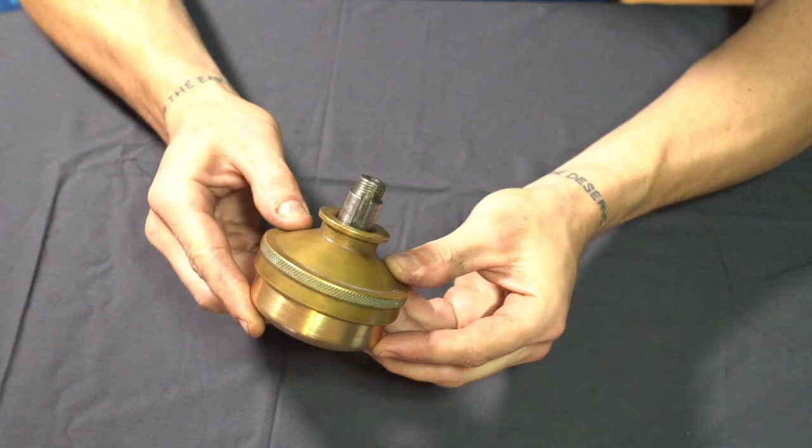Okay, so what are we doing today? I'm going to be making one of these things, well, part of one of these things. This is the top end of the gear housing which lives at the top of a steering column from a Model T Ford. It's a planetary gear set inside, reduction gears, steering wheel sits on top, output follows the shaft down to the steering ball joints, probably how I'll describe them. Steering box isn't really correct, but it's a pretty rudimentary device. I'll go to a cut in a moment and talk about where this sits using a video reference and how everything interacts. But long story short, I'll take this guy off.

With my Model T, which I have, it's a build I finished a few years back. It's an ongoing work, a labour of both love and hate at times. But I like putting brass onto my Model T. It's an absolute mishmash of different parts and years, but it's still a Model T Ford.

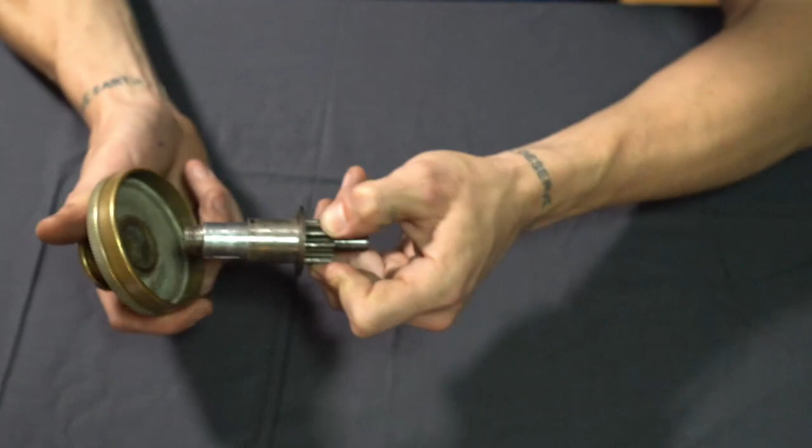Okay, so what am I doing? Put that over there for the moment. So this guy right here - it's just the cap which holds a shaft which the steering wheel sits on, a keyed shaft, there's a keyway through there, a hardened pinion, hardened washer, and then a ground hardened sleeve which fits quite nicely like such. The steering wheel sits on here. I'll put another video in a bit later and we'll go over how it's all put together.

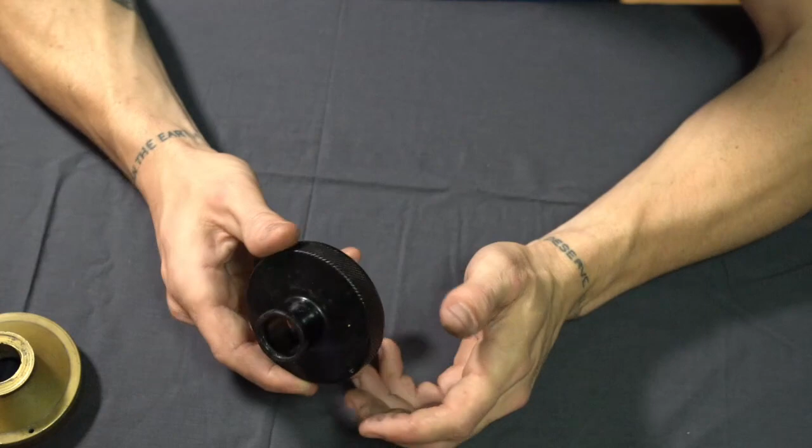Now, what I've always run on my Model T as a steering cap was this guy. It's just pressed steel. I actually don't know if this is an original or not - I think it isn't, given the knurling on the side has next to no wear on it, and a few other bits and pieces. But does this work? Yes. Do I like it? Yes. But I like brass more.

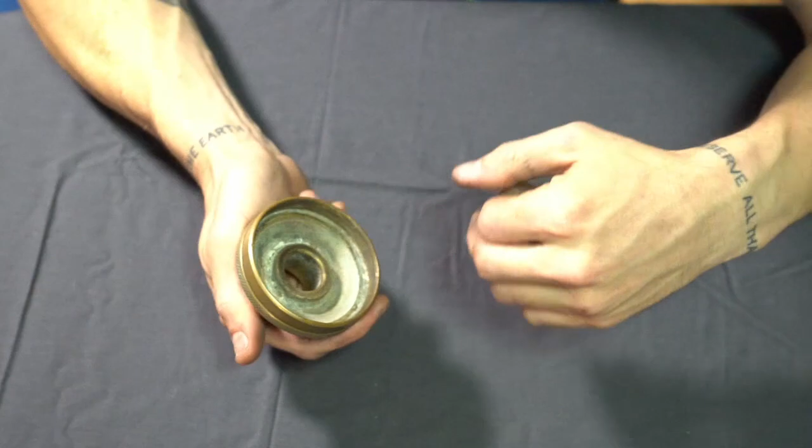So I've been very lucky to get my hands on one of these guys. It's an original from between 1908 and 1910, is my understanding. This one's in extraordinarily good condition - there's no marring through the bores, no marring on the top, the knurling is still in good nick, as is the thread on the inside. I don't know how much these are to purchase as originals, new old stock, or reissues. I enjoy making things more than purchasing things. So we're going to recreate this guy.

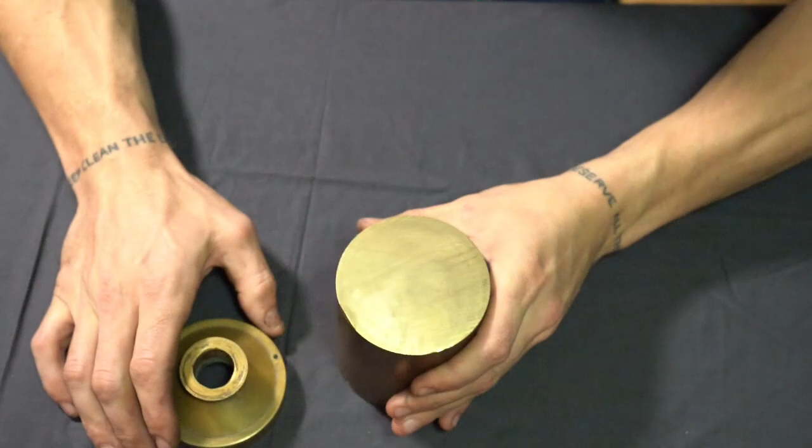So what am I doing it with? Well, brass - I'm doing it with brass. This guy is an 80mm bit of round bar, 100mm long. I ordered it online a week or two ago and it's finally arrived. Had to get it shipped in because trying to get this sort of brass in small quantities in Perth here is irritating.

So I will hope to put all of these video components together into one video so you can watch them in one spot, in one session, but who knows - we know these video series tend to blow out a fair bit into multiple videos. But it's a relatively simple device. First up, I haven't been able to get my hands on any tech drawings or technical specifications, geometries and such for this.

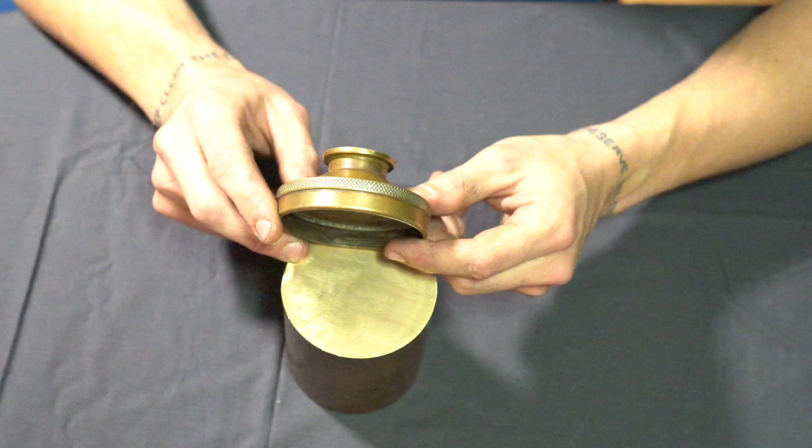So the first thing we need to do is measure all of our critical dimensions as well as our aesthetic dimensions. I'm going to look to recreate this as accurately as I can. There will end up being changes between this and that, of course, but I'll try to minimise or hide them. So if you have one of these on your car and mine ends up a bit different, call me out - I'm actually keen for that. But let's start taking some dimensions.

And there goes the lump. Alright, so I have some utilities for taking dimensions: paper is a good one, my model is a good one, caliper, thread gauge, and a pen. Pen is also extraordinarily helpful for taking dimensions.

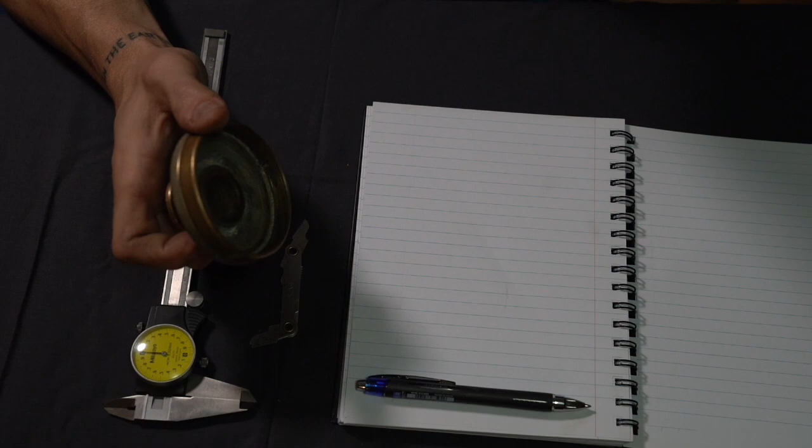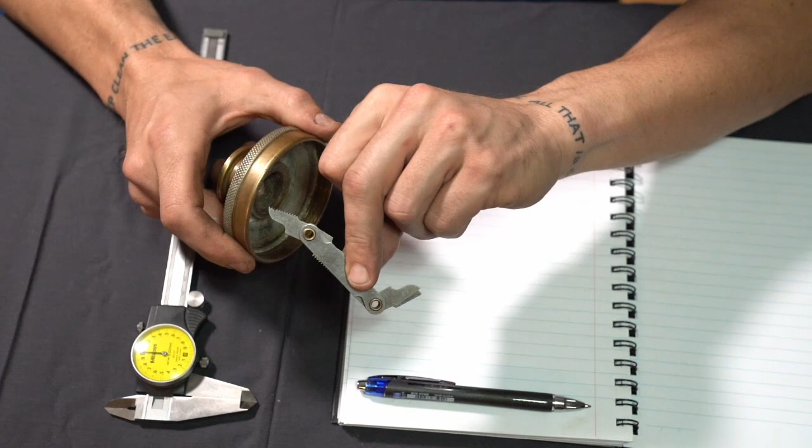This is an imperial measured item. The thread looks to be imperial. It might be Whitworth. I'm not actually intimately familiar with Whitworth, and I have no real desire to be intimately familiar with Whitworth threads. But I was able to get a good reading off that using an imperial thread gauge. So let's start.

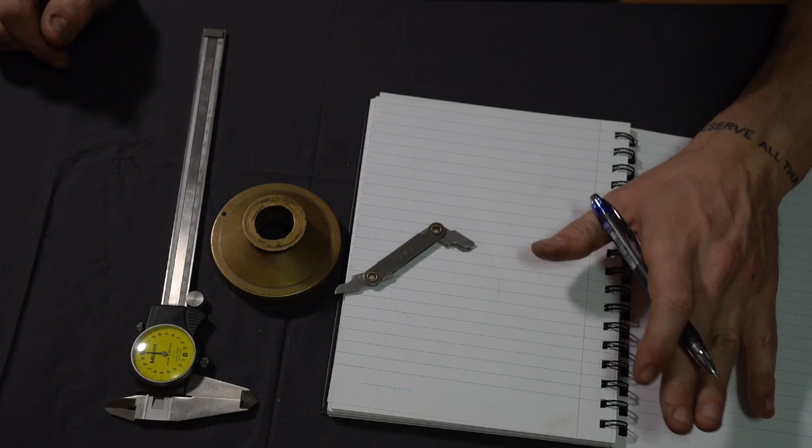Now, how this appears on the screen might be a little funky. I'm shooting over the top of myself from the front. I hate having a camera over my shoulder because I'm a klutz and I'll knock it over and I'll end up injuring myself, and then this video will never see the light of day.

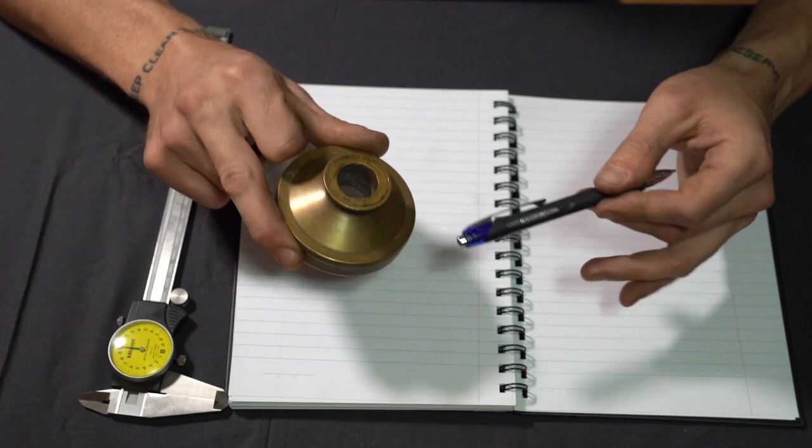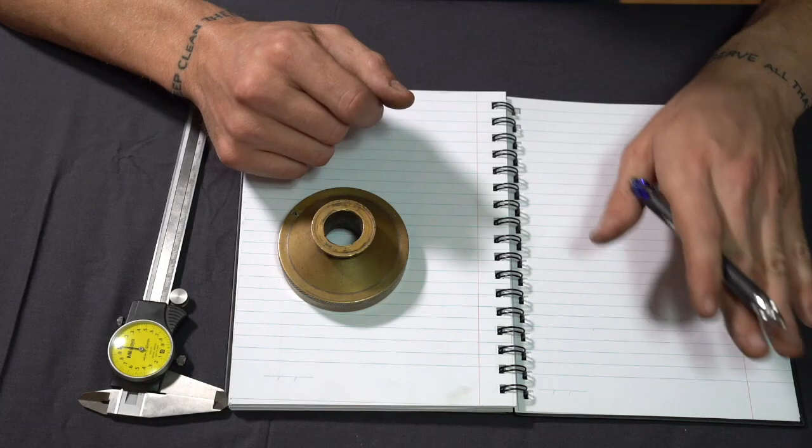Sweet. Alright, what we're going to do first up, I probably could CAD this better and faster. I'm no drafts person, I prefer having paper anyway as a reference, size reference for whatever I'm doing. If I need to at a later point, I'll photograph it because it ends up with oil and maybe blood all over it. There probably won't be any other mess involved, but we'll crack on.

So, rough shape. What I'll do actually, I'll bring this up to the camera and we'll have a look at it in general. So it's a revolved part, so if you can see that from the front, just picture that going around and around in circles forever. We have knurl, there's a reduced shoulder, there's a small flat on top here and then a taper. Now there's a small radius between the taper and the vertical section there, but it's a flat vertical otherwise with a small radius on the top side of that vert as well.

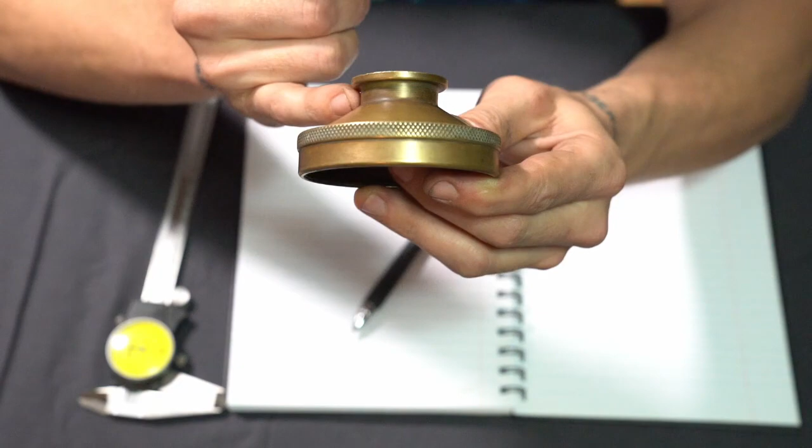I've got a shoulder. The top face here has a very slight counter bore. That might just be for washer locating. I'll be putting a copper washer in here afterwards as well. Then we have a bore. Bore is an important dimension, the size of that bore.

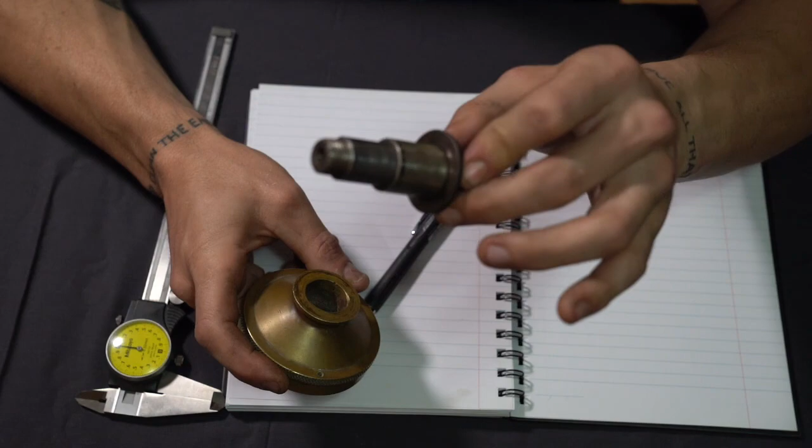So this axle, shaft, arbor that the steering wheel mounts on -- steering wheel on top, and it seats down here on that shoulder. This is a bushing for that particular steering shaft. So it'll go in there and it holds it firm.

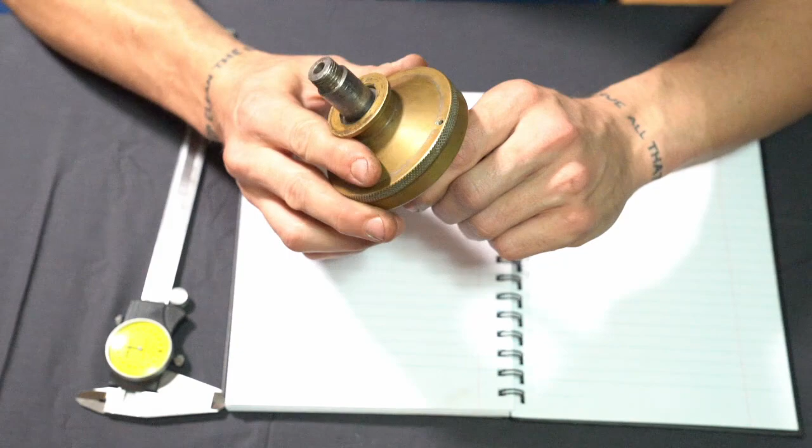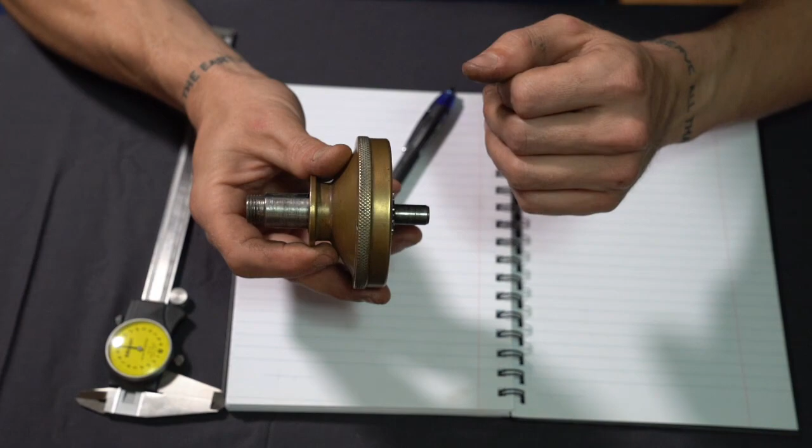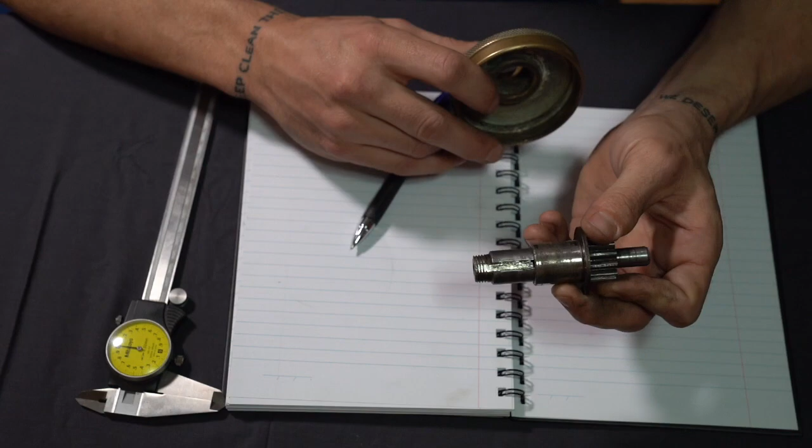So we want next to no play, radial play up here. End play within reason can be eliminated using washers, spacers, etc. But I want as little radial play as possible up here. So the bore's pretty important. Another important dimension is going to be between the bottom, where the thread's going to seat, and then the top face there. We can get away with a few bits and pieces there, but I want to try and keep that original. We only have so much room for adaptation in the length of this shaft.

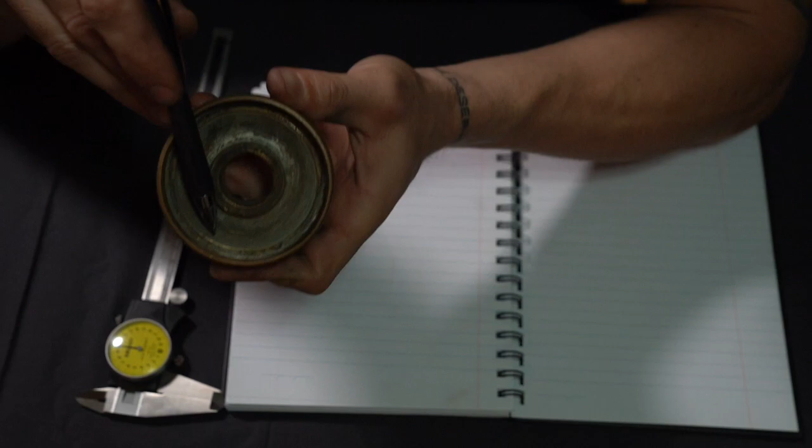Alright, next up, looking in. What do we got? So, yeah, this is all bored out through here. It's all hogged out and then bored out. If you can see in -- yeah, I think you can actually. There we are. If you have a look in there, there are still remnants of the casting process. That's a pretty rough finish. So I assume this has all been cast, and then it's been cleaned up through a turning process of some description.

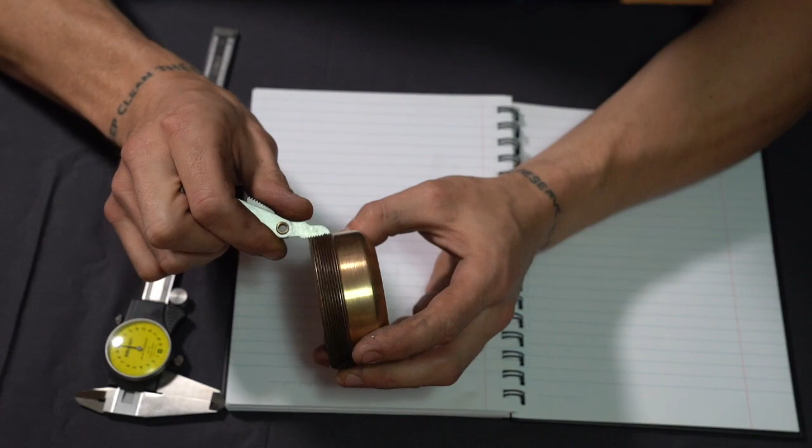Next important thing is the thread, which we can see -- I'm pretty good at this left and right thing. We can see a thread in there. Now, using my thread gauge, which I prepared earlier thankfully, it turns out to be 18. How are we going to do this -- 18 TPI. I'll use the opposite part of the thread. So if we can get a good look in that, and we can bring it up close, it's 18 TPI. So that's what we're rolling with.

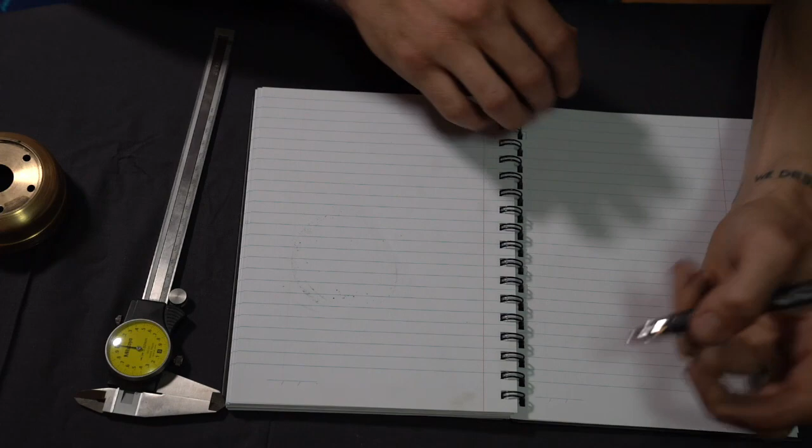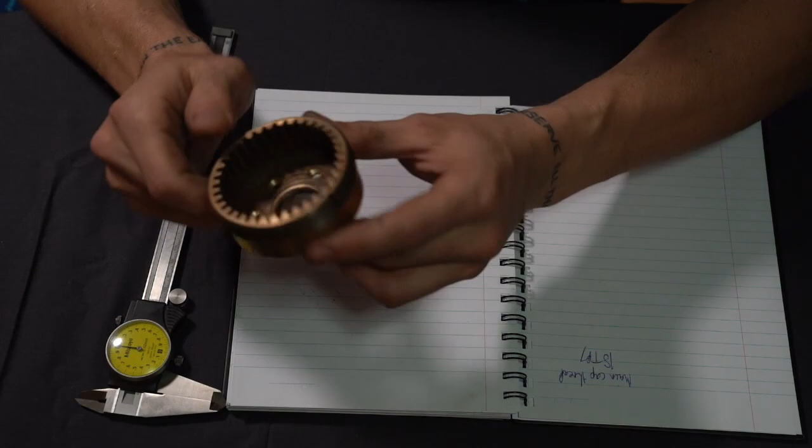Main cap thread, 18 TPI, fantastic. Now I'm also going to use the bottom part of the assembly, which that will screw into. I'm going to use this for size reference as well.

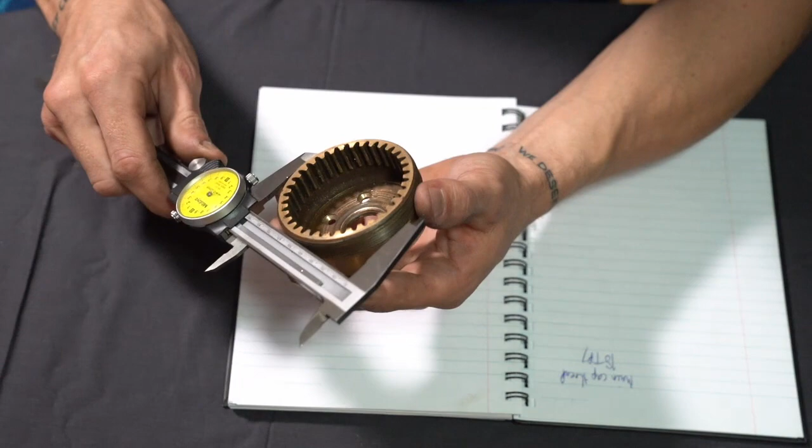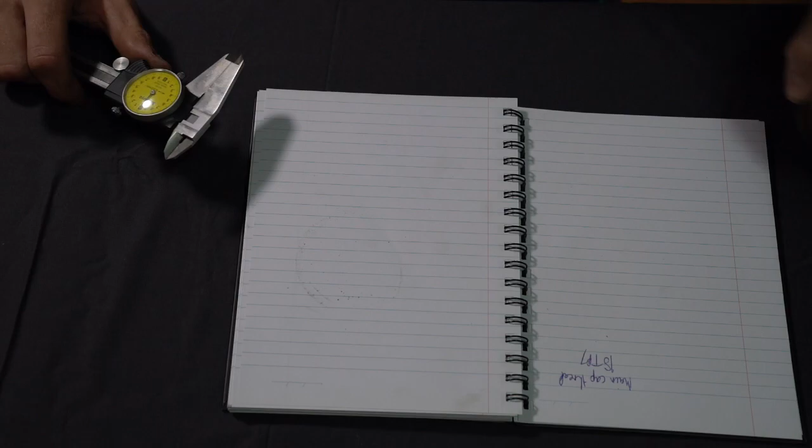So, what size is our diameter where that thread sits? This is obviously not going to be perfect, but -- come on, there we go. So we're going to have a look at that one, that way. So assuming the camera is focused on that, we're looking at 76 millimeters. So given wear on this and this, we can pretty safely call that 3 inches. So I will work out the minor diameter for the part that I'm going to make, but cool.

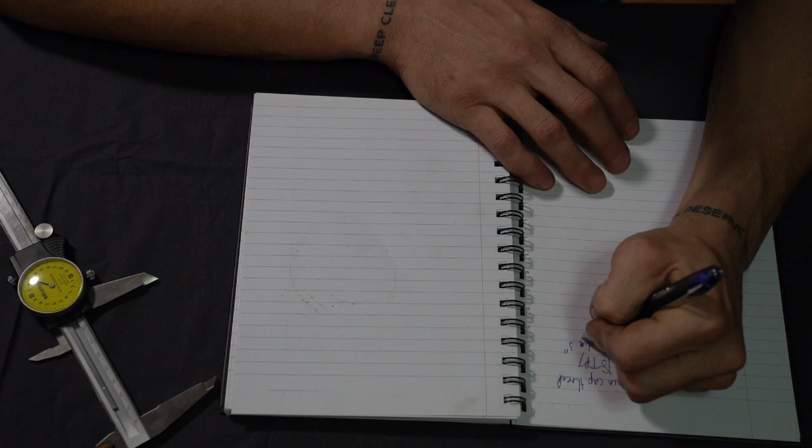3 inches. We're going to call that main cap thread diameter 3 inches. Thread has an A in it. 3 inch, or 76.5 millimeters. That's not right, but I'll leave it for the moment.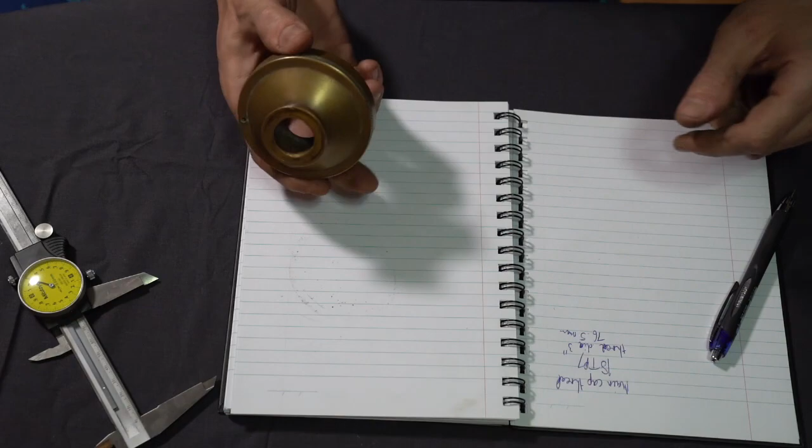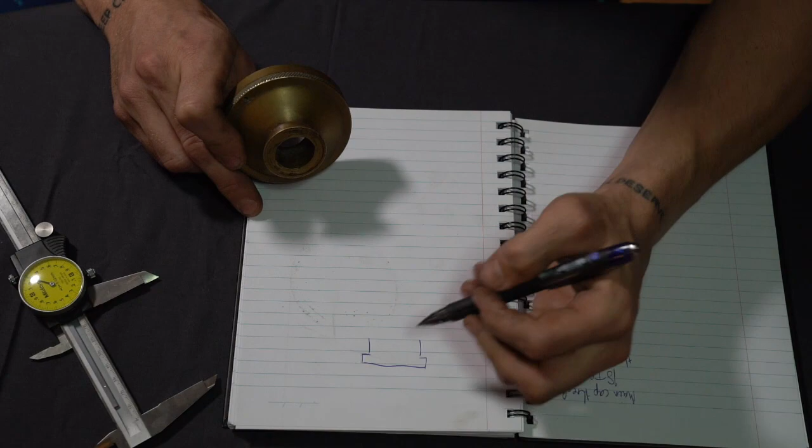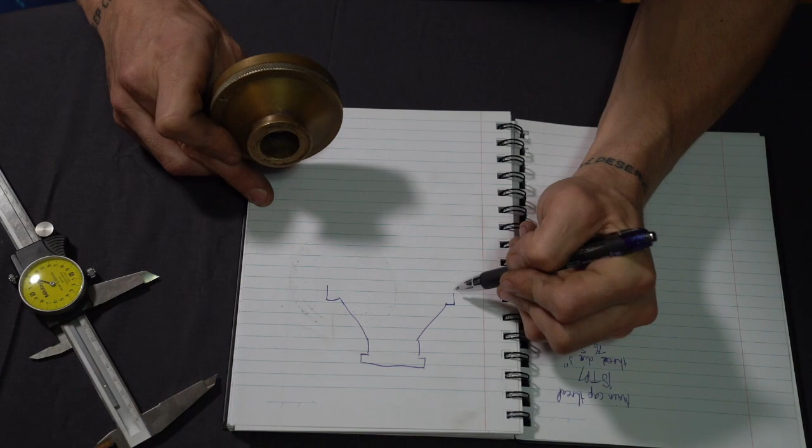Happy days. All right, next up, we're going to start plotting out bits and pieces. So I'll do a rough drawing. We'll do just the side profile of this guy. So we have, like so, down, taper. Flats -- we have 2 flats. We have a knurled section, which is stepped out a little bit. We're going to come in and then down, in and then down. Small radius down here. Alright, so there, side profile.

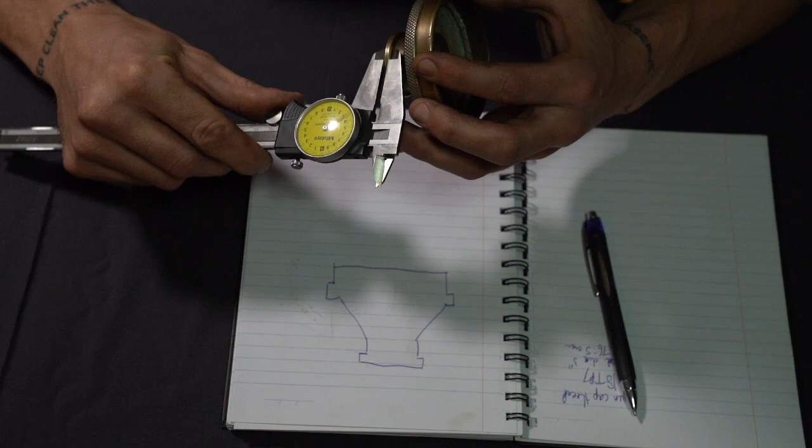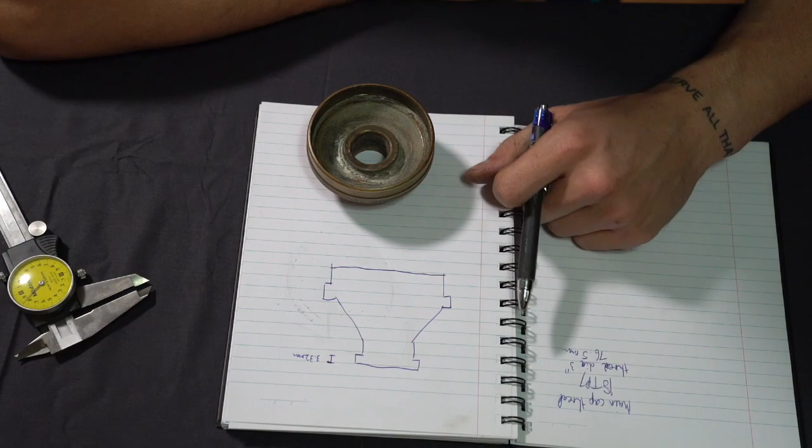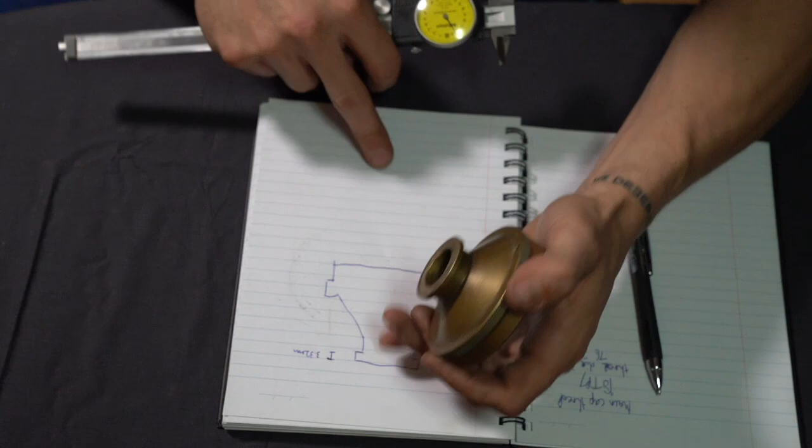Let's start taking some measurements. Alright, so calipers. Alright, so that is going to be 3.32 millimeters on that guy up there. There's every chance that all of this would make significantly more sense if I was taking these easier numbers, if I were doing this with an imperial, either inch standard or fractional caliper. I'm not going to do that. All of the stuff around the outside that I'm taking measurements for now, none of those are particularly critical dimensions. So that's fine. I'll sum up the total after I do the little bits, and we'll get a sanity check on that as well.

Alright, so let's have a quick look at this guy. So that vertical section, I'm going around the radiuses there. We're going to call that 8 millimeters.

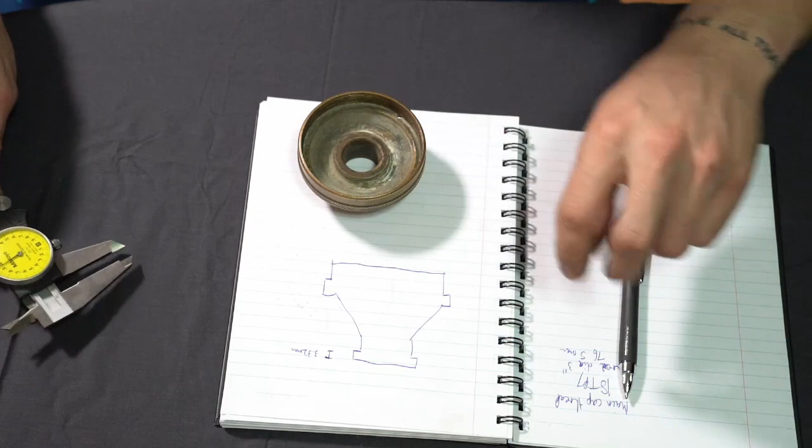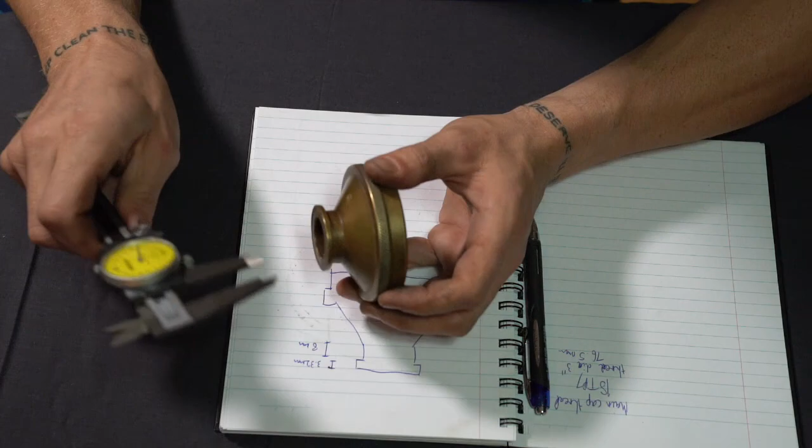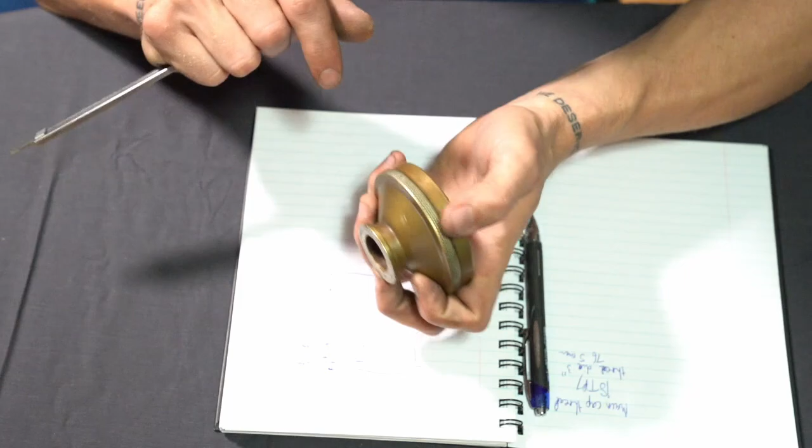8 millimeters on the vertical. Cool, next up is the height of this tapered section. I don't want to get a rule or straight edge in there, so I'm going to subtract the sum of the rest of the sections from the total height once I'm done. That's going to be the easiest way for me to do it.

Right, so the knurled section, that is 6.74 millimeters.

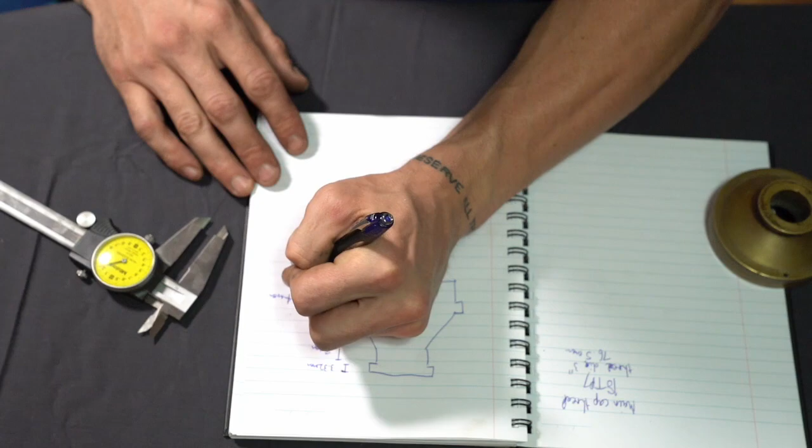Our bottom portion here. I'll get him quickly, close enough. Alright, that's going to be 10.26 millimeters. 10.26 millimeters, alright, happy days.

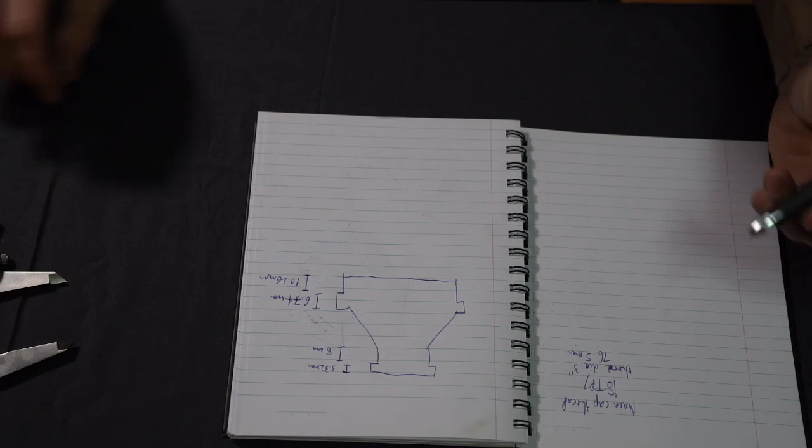Total height, I'll try and do this so I don't skew all of my dimensions. I'll keep it generally square, my calipers. 40.64. So this whole thing, 40.64. Happy days. Alright, let's work out the height of this tapered section.

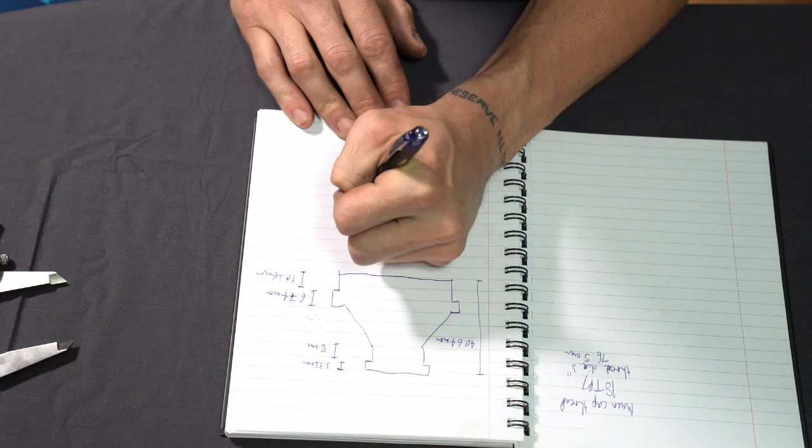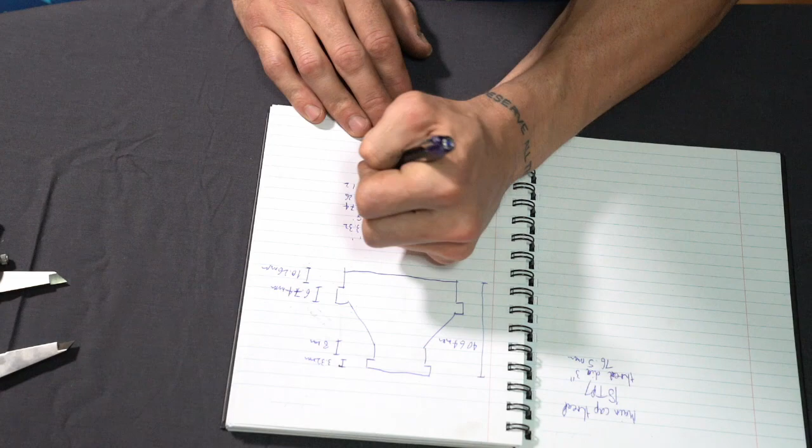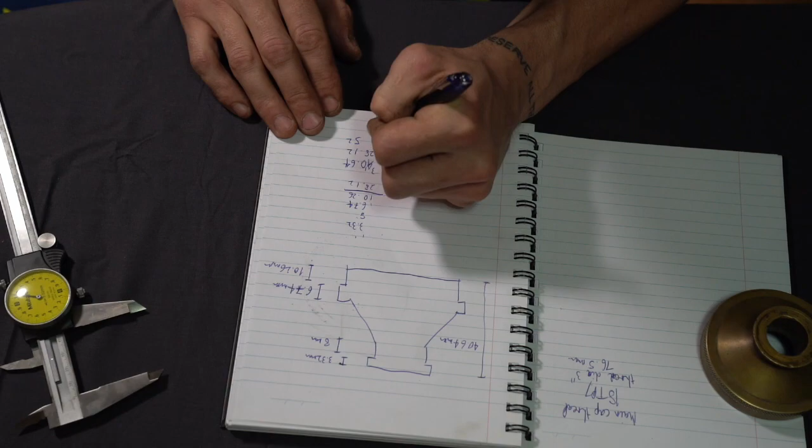So 3.32 plus 8 plus 6.74 plus 10.26... 28.12 is everything else, so 40.64, minus 28.12... 12.52 millimeters. Sanity check that one.

Let's bang out 12.5 millimeters. Alright, cool, that looks pretty good. You probably get some parallax error from where you're looking at it, as did I, but that looks pretty good to me. So that, 12.52 millimeters. Alright, external dimensions done, happy days.

Let's look at diameters. Alright, do the bottom part first. 80.6. I'm going to do most of these diameters inside.

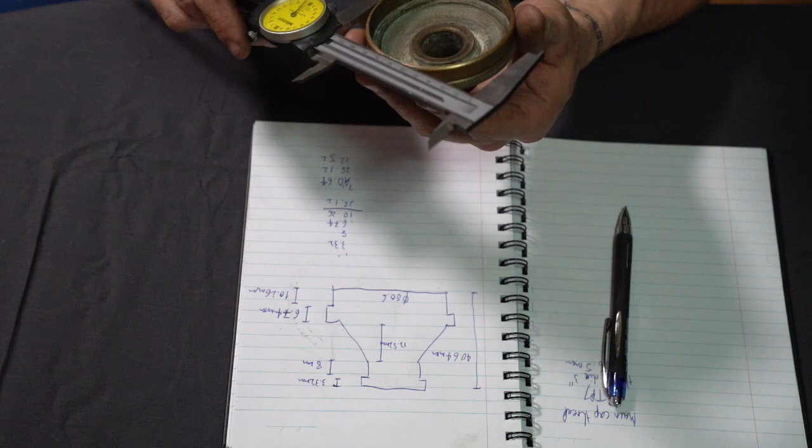Sweet, knurling, or a knurled section rather. 82.06. Happy days.

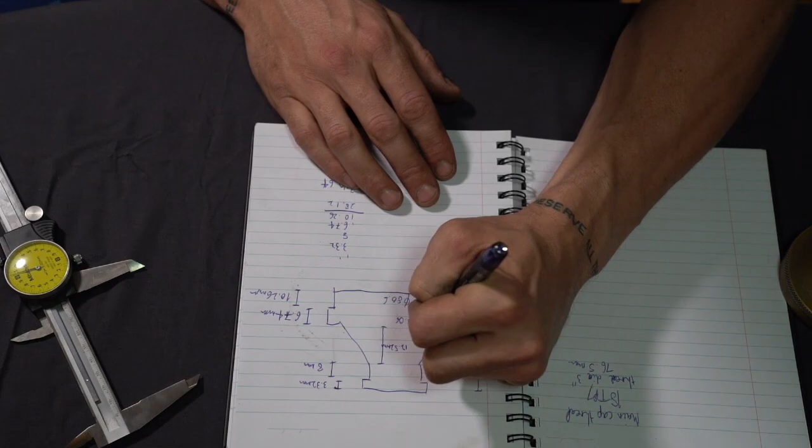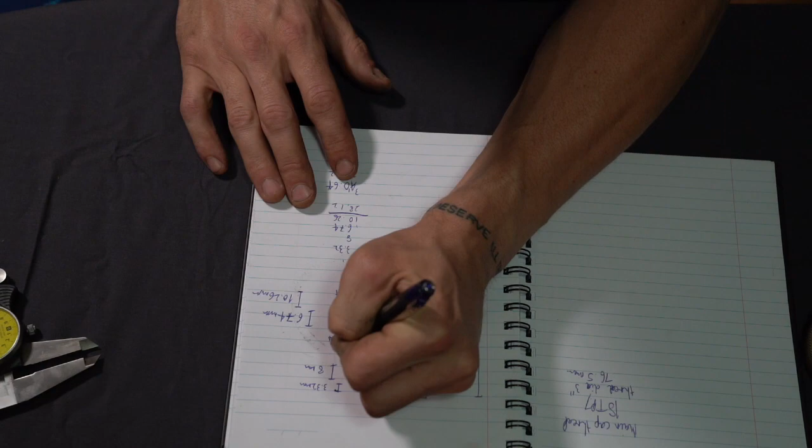Size of this step we're going to be looking at, if I can try and get that outside of the fillets in the middle there. 5.8. 5.8 millimeters. Once I've done all this, I will neaten up the drawings and use those as my reference drawings, but for the moment this will do.

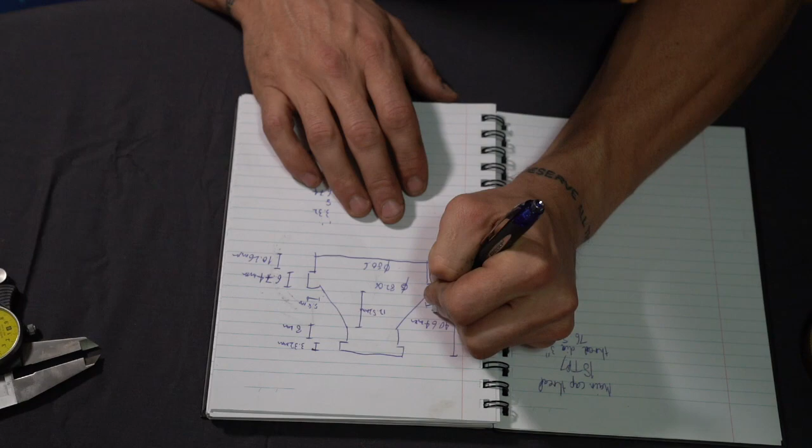So 5.8 here, which means there's 5.8 there, which means there's 11.6 total. So this part is 82.06 minus 11.06 - I'm going to do that again.

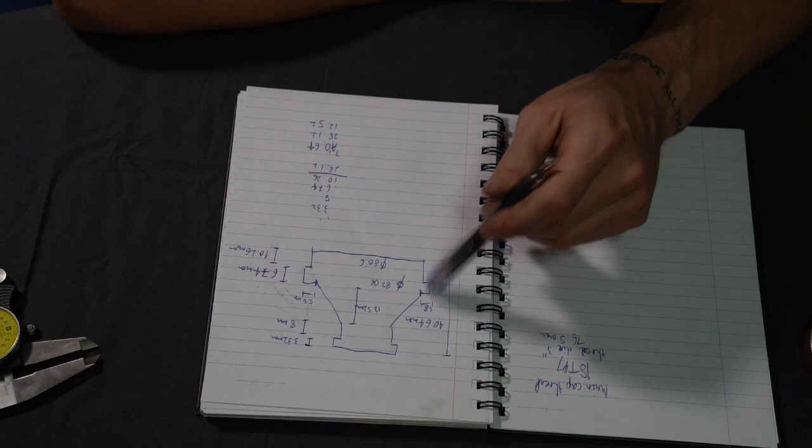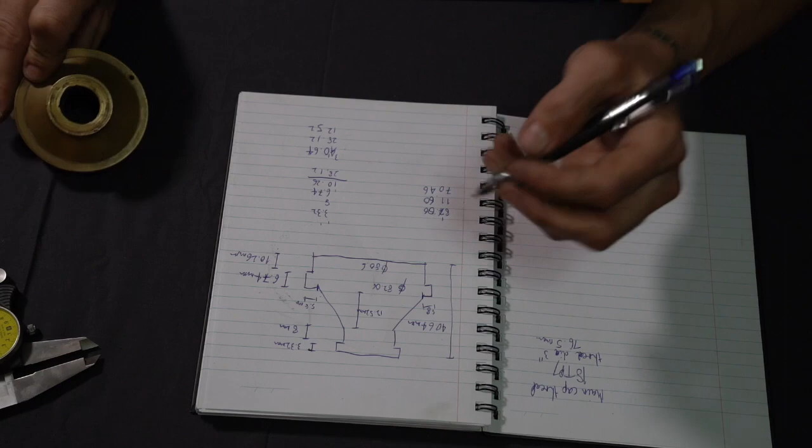Yeah, 11.60, sorry. 6 minus 0 is 6, needs to be a 1, 10 minus 6 is 4, 1 minus 1 is 0, 8 minus 1 is 7. 70.46 at this portion here, on the inside of that taper. 70.46 diameter. Alright, next part's easy, of course.

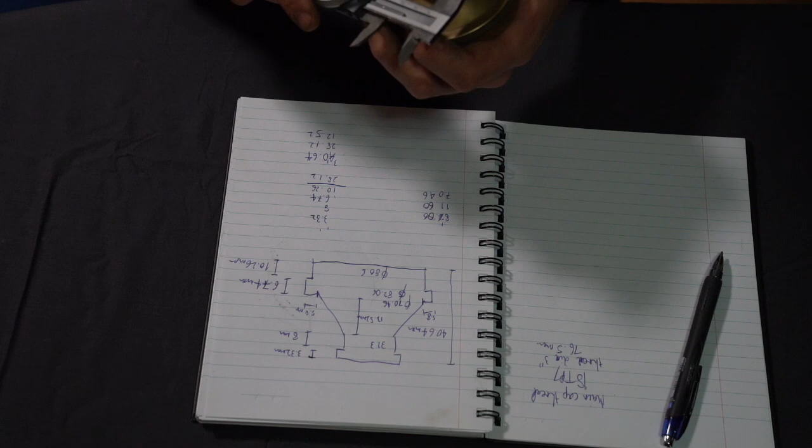This section up here, what are we looking at? 31.3. And then the top, we're going to call that 40 clean.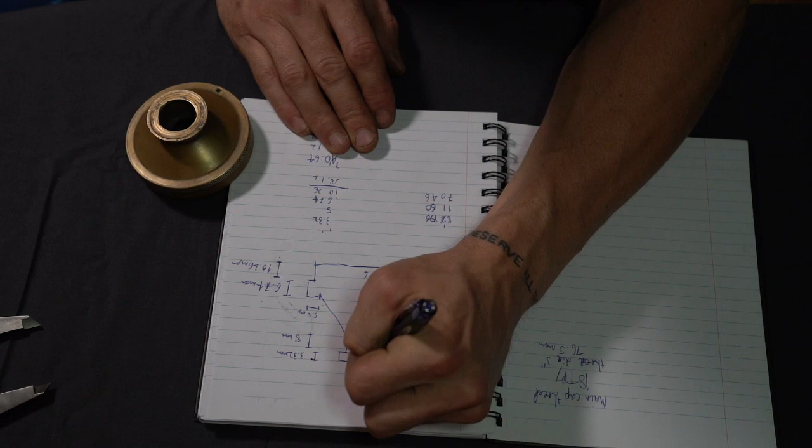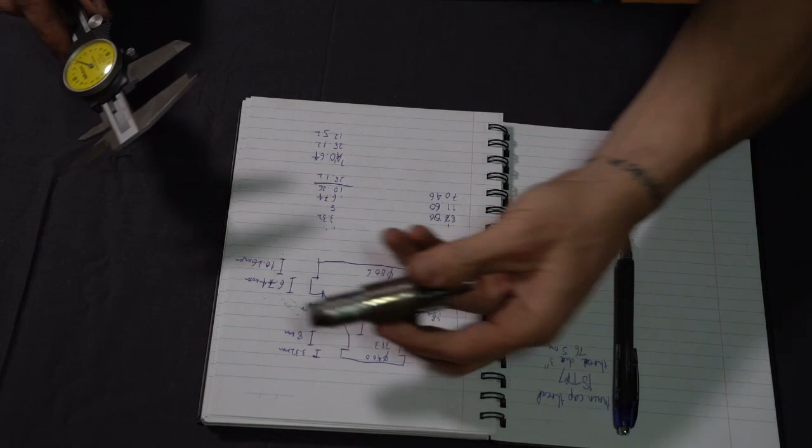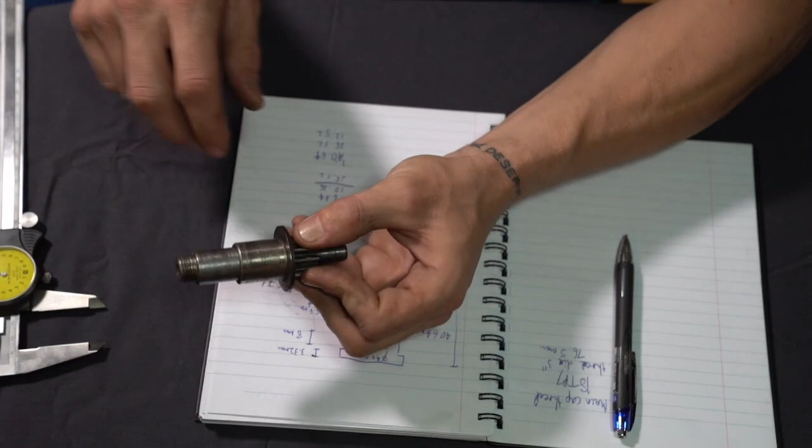Next, through bore. Alright, what I'm not going to do is measure that. I'm going to measure this guy instead. 24.74 it says. Now I did actually throw a micrometer on this the other day, just a 0 to 1 inch micrometer, and it did work out to be that same value, so I'm quite comfortable that that is going to be 24.74.

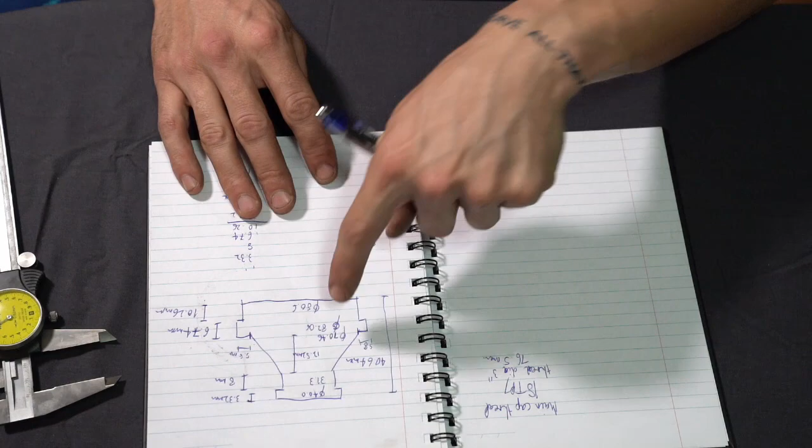So let's just recreate that drawing, that shitty thing here, down. And this is just going to be the details for my internal features. Yep. No prizes for that drawing.

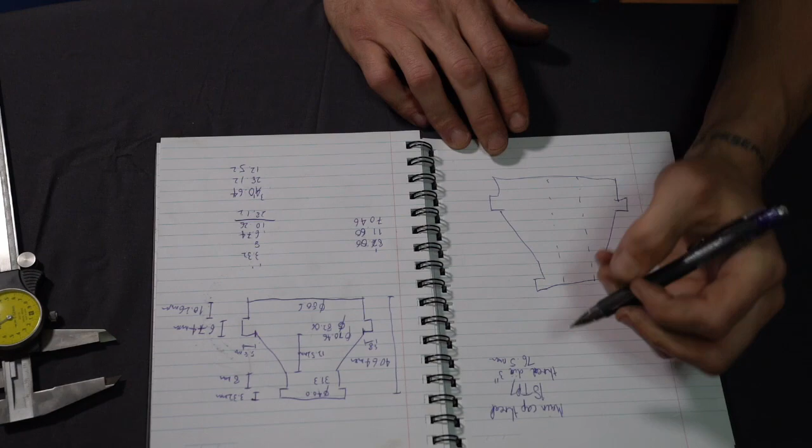Alright, so we have a bore coming through. That is 74.04 diameter.

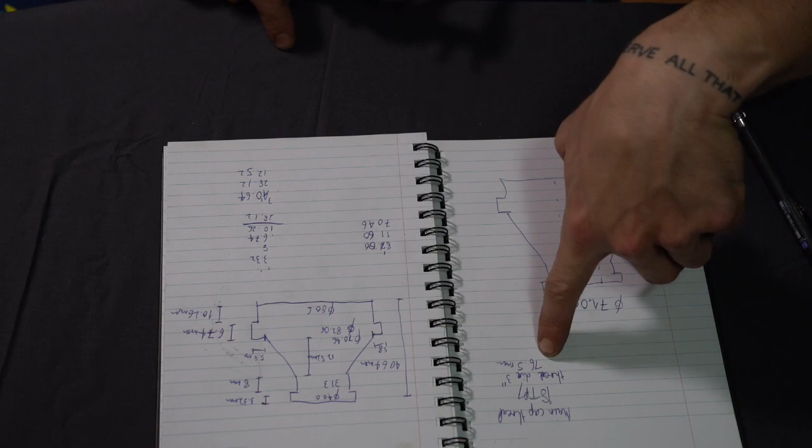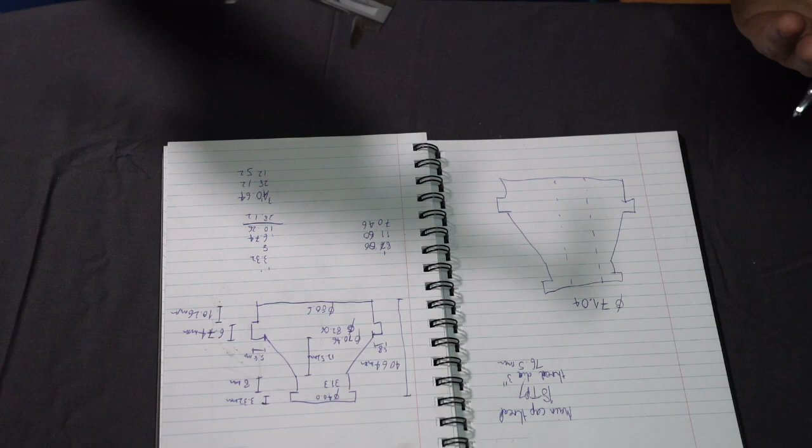I am going to measure this and record it, but we'll be rolling off that 3-inch major on the outside of this guy. But let's have a look. Cool, 74.7, much the same as up here. I'm going to do it inside the diagram. Alright, let's call that a thread. 74.7.

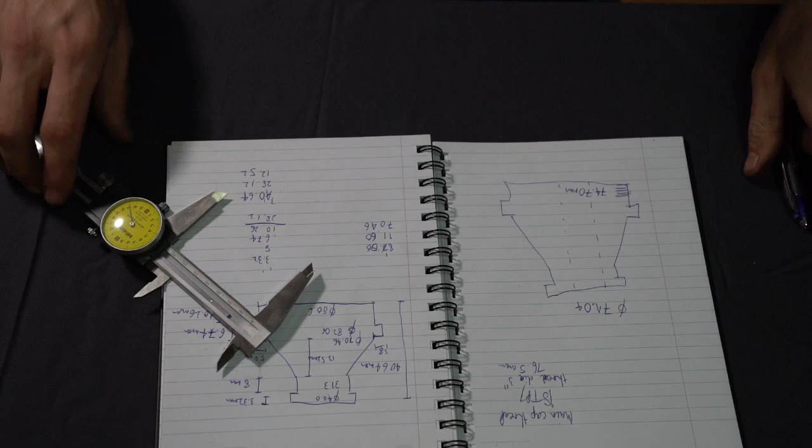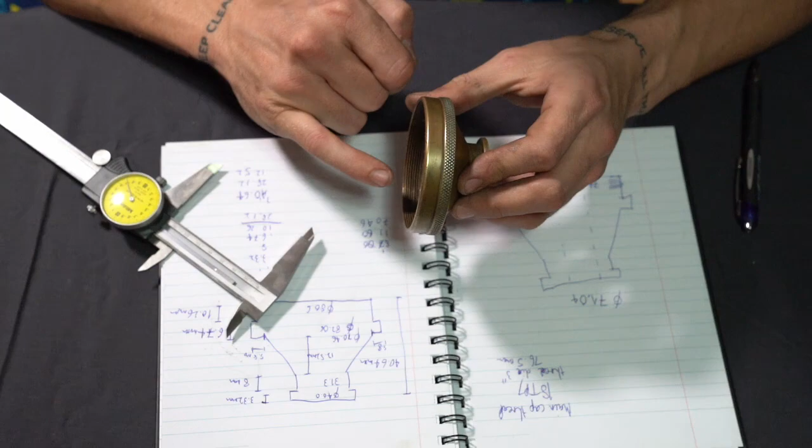Fantastic. Okay, from here I will rely again on the actual steering column for what everything else in here is doing. None of the other dimensions in here are critical. There is a heap of meat between just above this knurl and the bottom here. So I can actually give myself a quite generous thread relief at the deeper part of the internal thread here.

But what does this say it needs to be? That is 11, 12, 13.14. Alright, so that extends up minimum 13.14. I'll give myself a generous thread relief there, anyway.

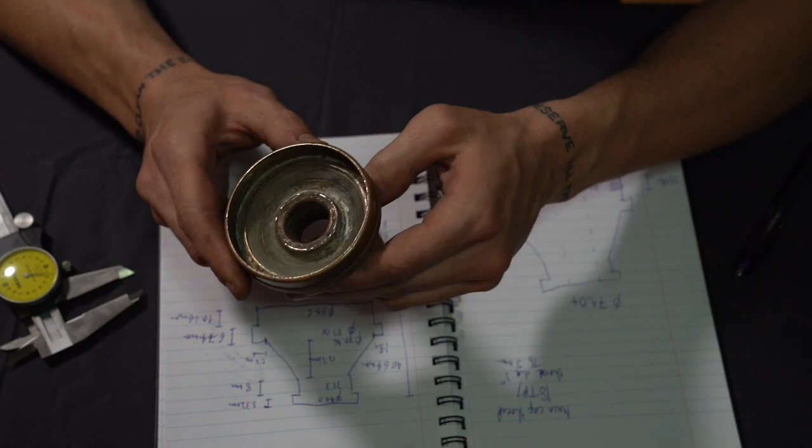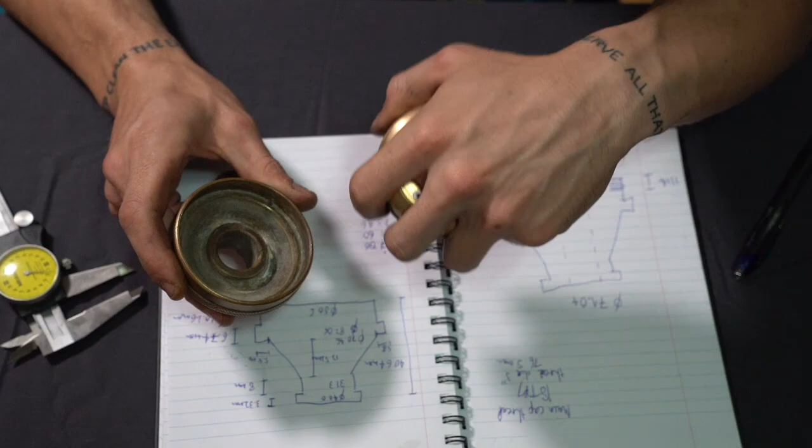I will retain the extended boss on this part here, just for a bit of extra strength. But looking at clearances of the 3 planet gears which roll around in here, all the clearance in here is not critical. They have enough room to get about with no rubbing. And the more I put in here, the larger this cavity is, granted the more grease I can get in there, which is probably not a bad thing.

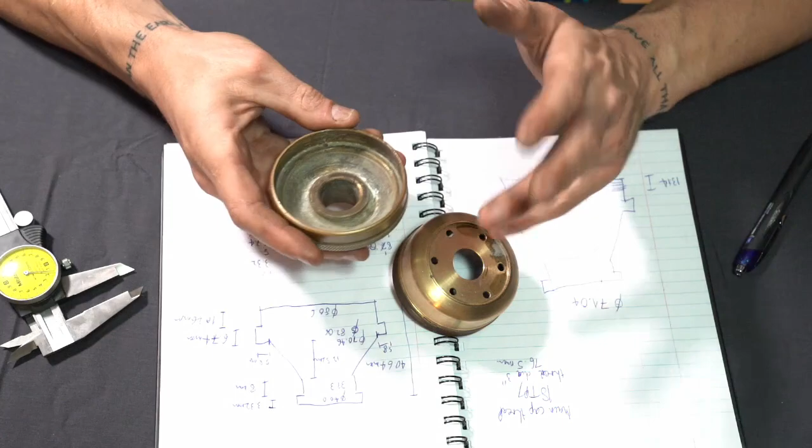If I leave too much material in there, it's going to weigh a fair bit - not so much a drama. So I'll see how I go when I end up machining this part. But I think, for the moment, as far as those dimensions go, that's enough to get me by.

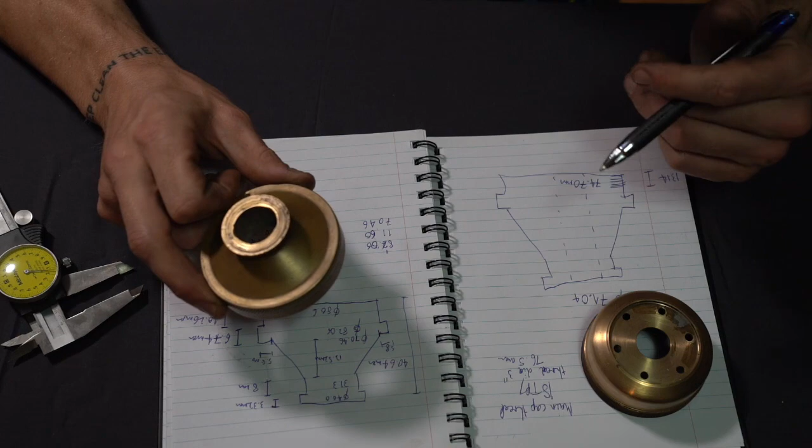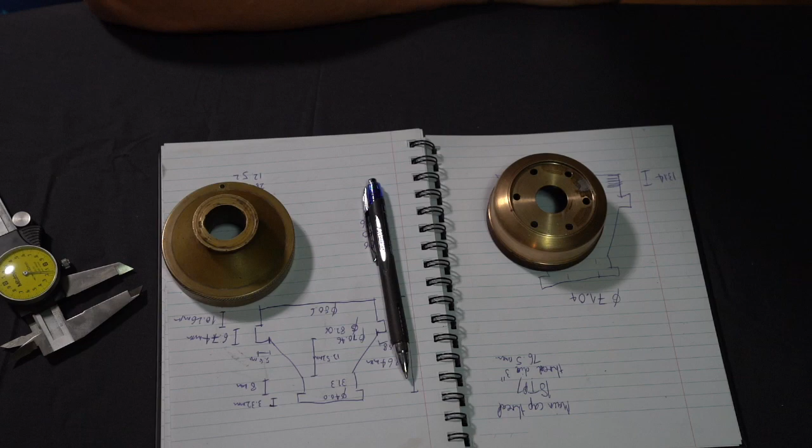I'll be able to do a lot of test fitting on the parts this will be installed on, or its replacement will be installed on, either while it's still in the lathe, or on the removed steering column at the moment. So next up, what we're going to do is head to the lathe, and we're going to start turning some good brass into scrap. Meet you over there.